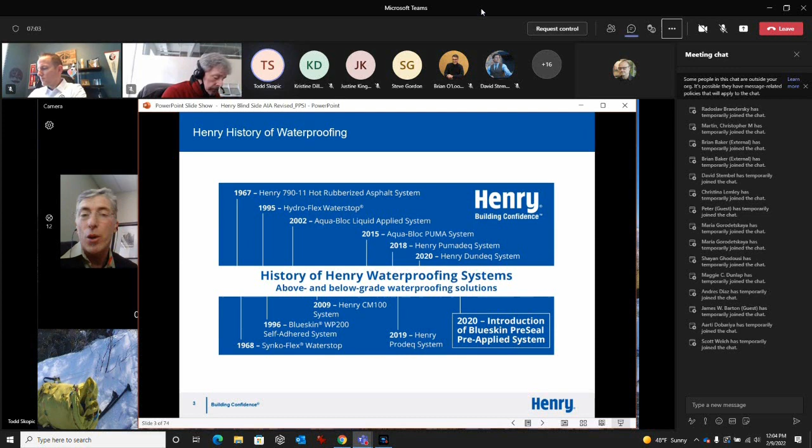We also have our own water stops that we've had for a long time. There's a chronology of some other waterproofing systems, and then we decided to release this pre-applied blindside system during the pandemic, about a year ago, and we've had great success. It's been the missing link or missing piece of our building enclosure portfolio.

These are a couple recent projects. That was in the summer over here. This is a school up in Staten Island, and the picture to the right is another school up in Cambridge, Massachusetts, at MIT. I took that a couple weeks ago up there in a little light snowstorm.

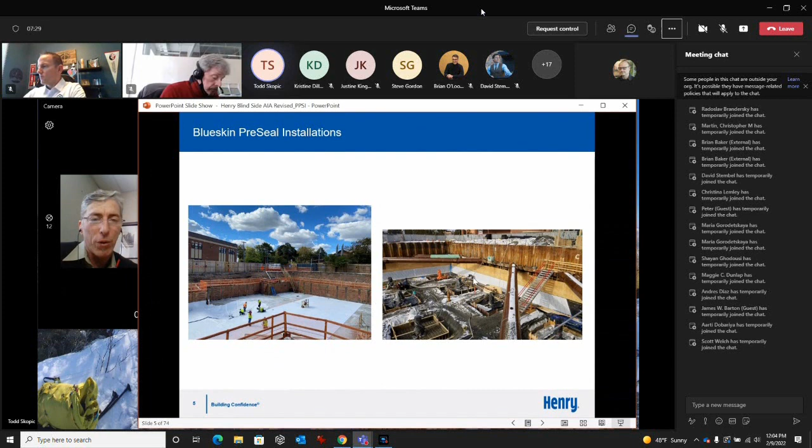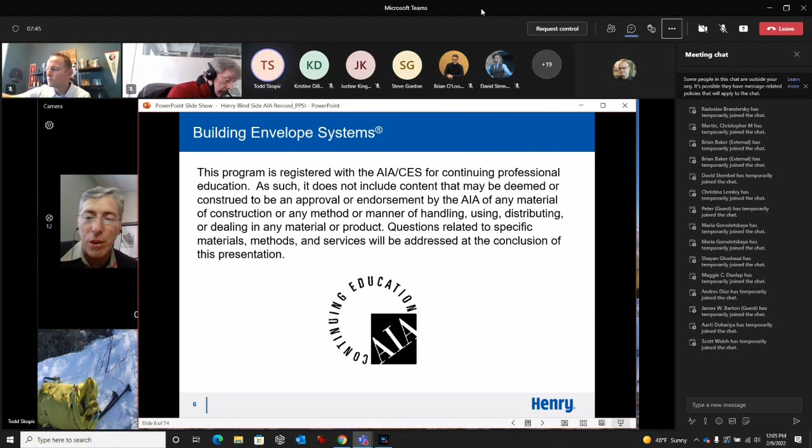So this is AIA. We'll keep it fairly generic and clean, but the intent is to provide education. Both myself, Brian, and Steve have a lot of history and knowledge with these deep foundation systems.

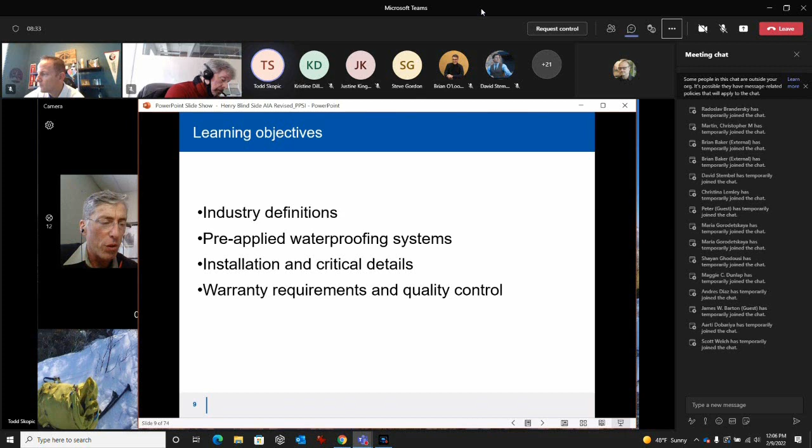The learning objectives: I'm going to go through some brief industry definitions, what are pre-applied waterproofing systems, some installation and critical details, and some warranty requirements and quality control, which are really critical because you can have a great system, but if it's not installed properly, it doesn't really matter. So we have a very good QA, QC program and a good warranty program as well.

So some definitions, this is somewhat elementary. There's both positive side waterproofing and negative side waterproofing. Positive side is the same side as the source of the water, so you're basically putting a system on the same side as the source of the water.

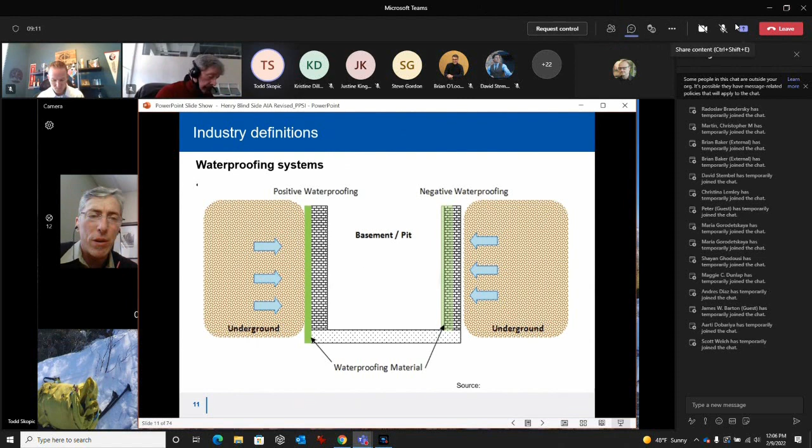Inversely, negative side would be the side opposite the source of the water. That's not really the way you want to lead your design, but if it's a retrofit and there's no other option, then you're looking at the negative side.

There's both pre-applied and post-applied systems. What we're discussing today are pre-applied or blindside waterproofing systems, which are also positive side. The systems are on the same side as the structure as the source of the water, but they're installed prior to the structure. So you've got this green appearing system here, which would be under slab waterproofing, and then vertical waterproofing, that would be your pre or blind side waterproofing.

Post applied is either you cast a wall, let it cure for a few days, and then post apply a sheet membrane, or in the case of negative side, that's also a post applied system.

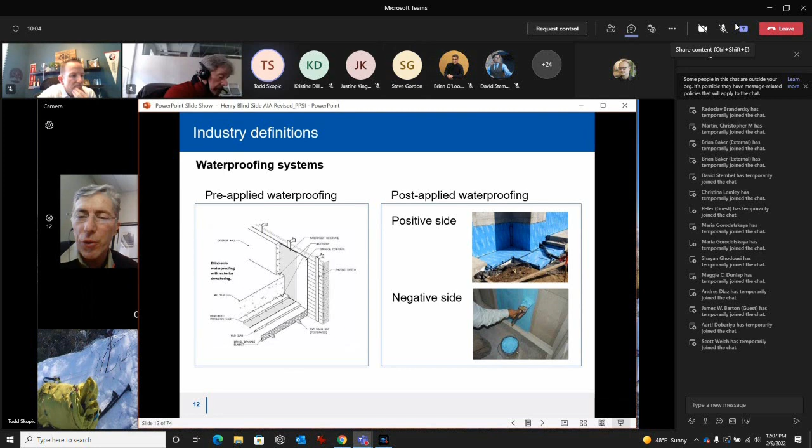The parking situation in DC is pretty crazy. I think there's a parking spot, at least it was about a year ago, in Georgetown in a garage that you could purchase for the low price of $80,000 to get a deeded parking spot.

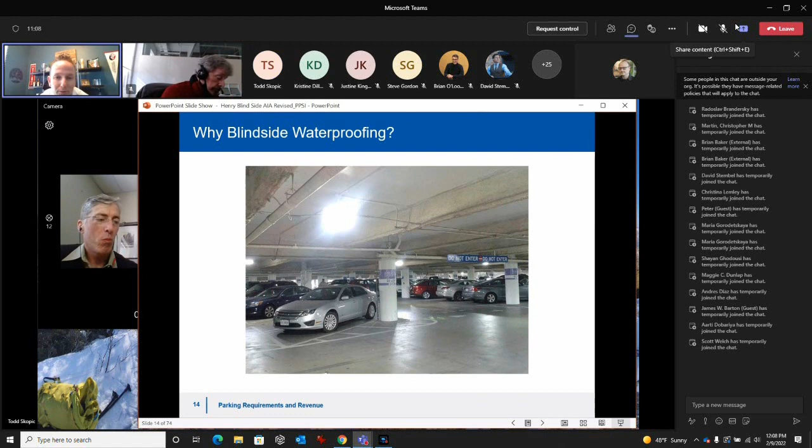These parking spaces generate a ton of revenue for the building owners. That's why we do blindside waterproofing, because we need to push these buildings out so far to the property edge so that we can fit in one or two more parking spaces. This will come up a little later too, some of the issues with blindside waterproofing and why we see leaks. But this is the main thing: everybody needs this space for generating revenue, but also a lot of times the number of spaces is a requirement based on the permits being received.

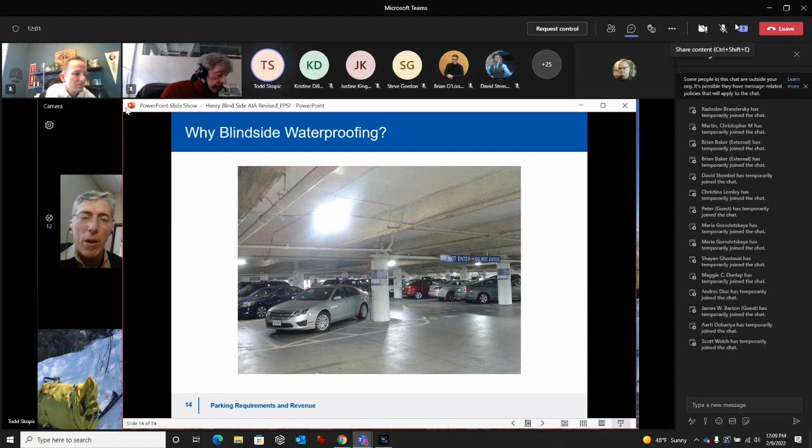A case in point with parking garages: a lot of times owners like to have a well-lit parking structure or parking garage, hence the lighting, etc. So painting the walls white is obviously going to make it much brighter in appearance. And if you have vapor or water pushing through that foundation wall, then the paint is going to fail. So that's another reason you want to keep water and vapor drive away from those walls.

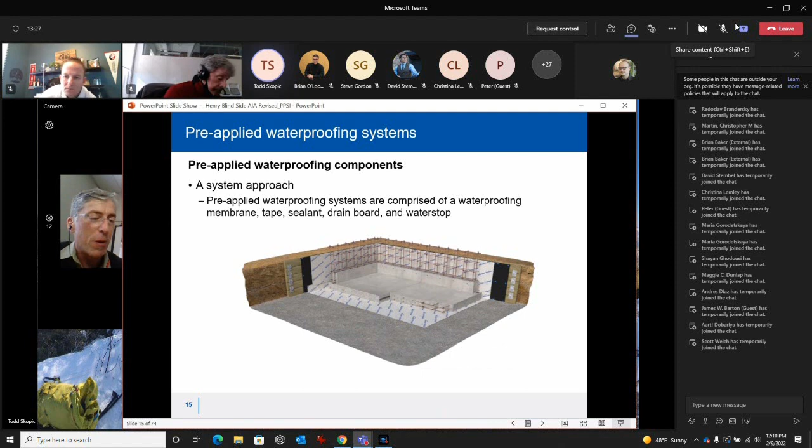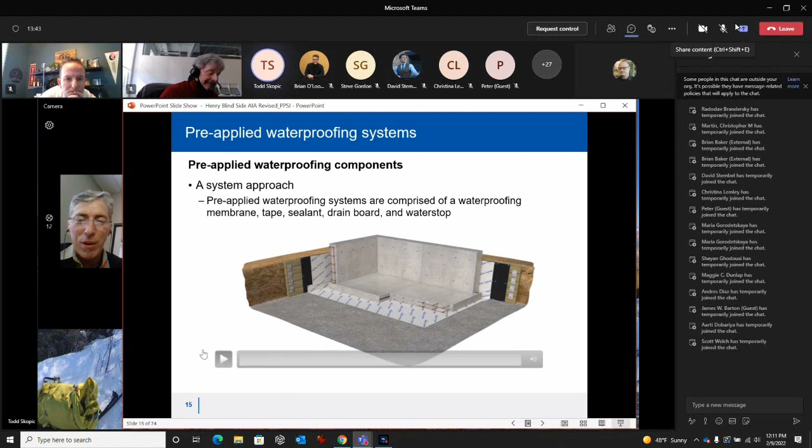And of course, if it's from the same supplier as the waterproofing system, that supplier can likely provide a single source warranty. So anyway, just another little aspect of this graphic, and then the wall gets poured and you're done. So that looks pretty simple and clean, but as Brian and I will share with you, it's not always that simple and clean.

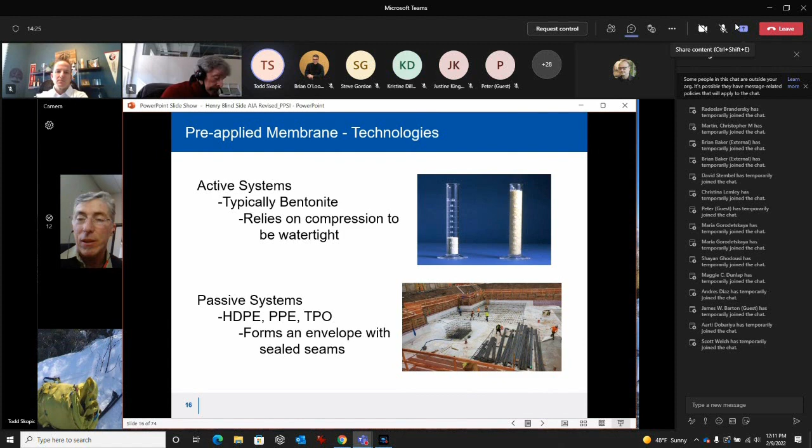Basically there's both active systems and passive systems. So we've got positive, negative, pre-applied, post-applied, and active and passive systems. Active systems would rely on hydration and compression, so that would be your bentonite type systems. Passive systems are basically waterproof membranes, like a high density polyethylene, a polypropylene, a thermoplastic polyolefin, or TPO. Lots of chemistry or alphabet soup there, but basically it resists water right out of the gate. It doesn't require hydration, it doesn't require confinement, anything like that.

The way these systems interface with the concrete is very important, because prohibiting lateral water migration is of paramount importance. So you can either have a mechanical bond, you can have an adhesive bond, or you could have both. With a mechanical bond, that can allow for lateral water migration. So if you have a geotextile with a sodium bentonite in that geotextile, it's going to bond to the concrete mechanically, but water could potentially migrate laterally. If you have an adhesively bonded membrane, that's good for prohibiting lateral water migration. And then there's a technology, it happens to be ours, it's a hybrid technology that offers both mechanical and adhesive bond, which if there's time at the end, we'll cover that a little more.

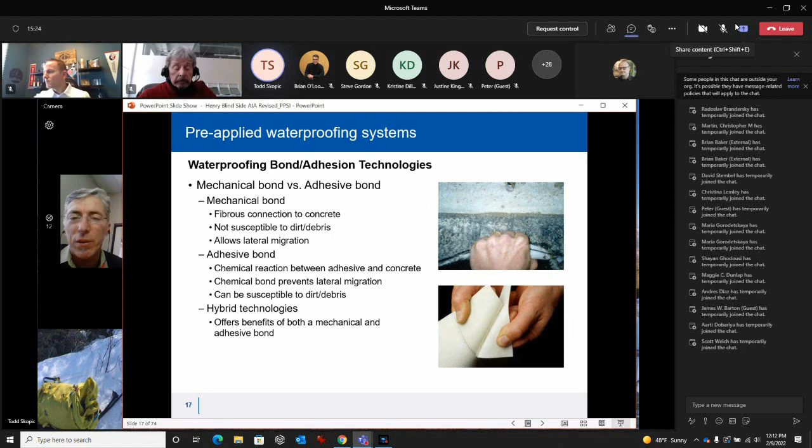So these systems are pre-applied prior to the structure, for both under slab and vertical walls. This little diagram here: if you have a crack and the water gets in, if the membrane's not fully bonded, then that water can travel to find a way into the building. So you don't want that.

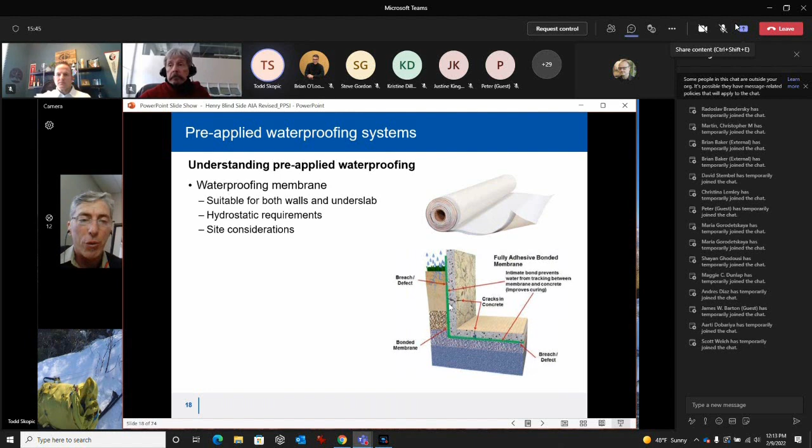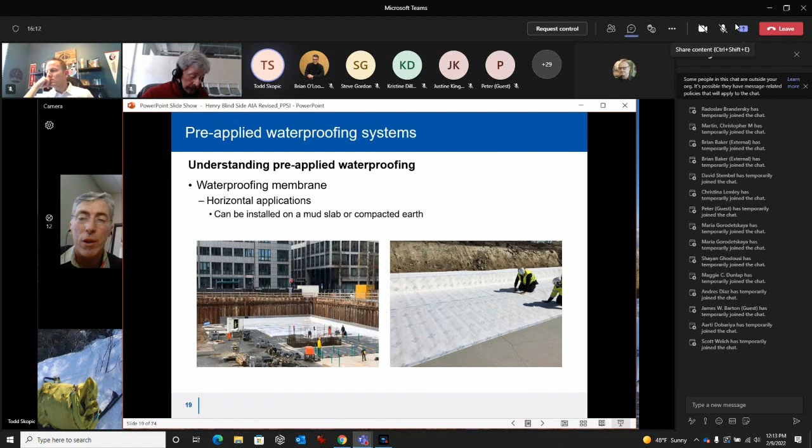Here's a couple of pictures of some horizontal or under slab applications. Some systems require a mud slab. So what these gentlemen are working on here is a little cracked and whatnot, but it's not a structural slab. It's just basically a working surface to get the work out of the mud, hence the term mud slab. Some systems can go on compacted earth or compacted gravel, so that's going to vary by your manufacturer.

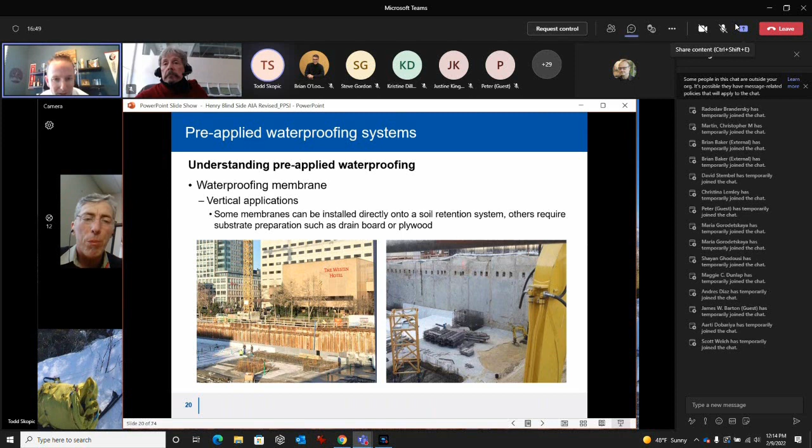We don't see that too much down in this market in terms of SOE construction. Right. Yeah, okay. I wasn't sure if there was something else you wanted to add there.

So why is the reason for most leaks in blindside waterproofing? Basically what we're looking at here is the sheeting and shoring guys. These guys are 90% of the problems of the waterproofing leaks. The reason being is they have one job and one job only, and that's to hold the soil back. They don't care if the building leaks. They don't care if they provided a smooth substrate. They've basically been contracted to just keep the soil from falling in. They're retaining the earth.

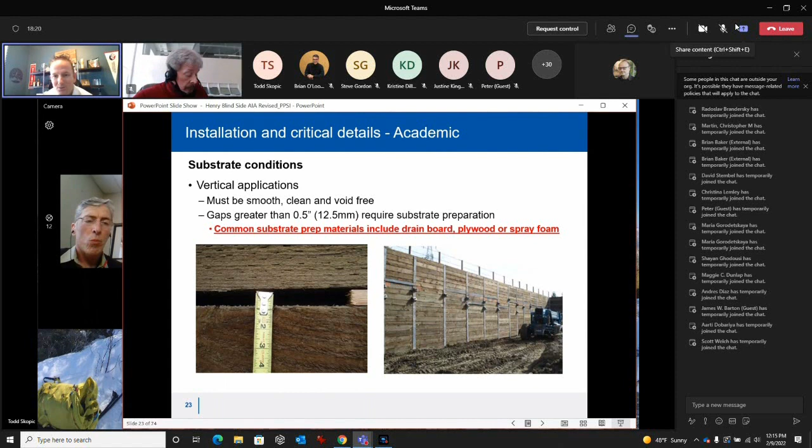The critical details, the academic part of this, is gaps greater than half an inch require substrate preparation. This can be drain board. In a lot of cases in DC it's drain board, but let's say we don't have drain board. Plywood, spray foam, those types of things can be used for this. Typically I don't see spray foam used a lot because while it's an academic way to do it, spray foam doesn't typically expand out to a nice flat substrate. It kind of looks like the surface of the moon as it expands, and that doesn't really give us a great smooth substrate to attach to.

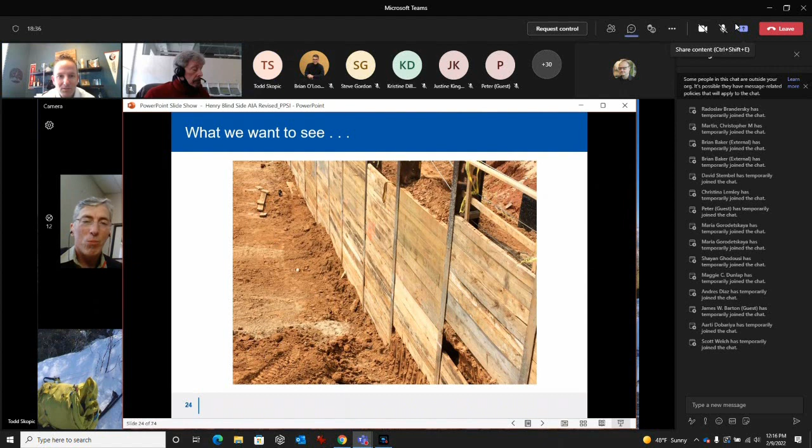So this is what we want to see. If I saw lagging like this in DC, we probably would never have any leaks. This is amazing. So if you go to the next slide, this is typically what we see.

So again, these guys, they're not concerned about how you're going to have your waterproofing applied to this wall. They're concerned about the substrate or the soil falling into the hole. So they're going to do whatever means necessary to make that happen, whether that's going to be walers or rakers or tiebacks or whatever needs to be. And a lot of times they are not even anticipating all the things that they're going to need because they'll dig in and find they have problems. We'll see some of that in a little bit here.

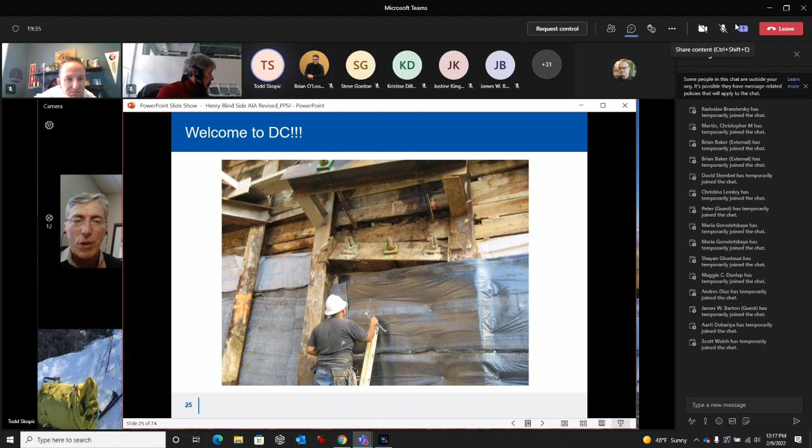So Brian threw out that term, a waler. This horizontal beam here is referred to as a wale or a waler. And a raker is basically a diagonal strut that would go from the soldier beam down to the foundation, and then there's all kinds of cross lot bracing and lots of crazy stuff. So how is it drawn? There was nothing in this slide. Yeah, so how it's drawn, you guys typically draw straight, perfect everything.

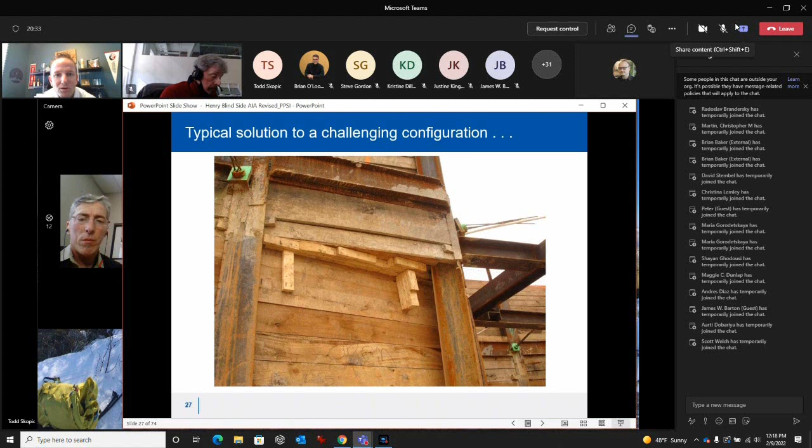So what about mid-lag, back-lag piles? You can see the lagging boards look pretty good, but now all of a sudden we've got a mid-lag pile, which means the lagging board goes to either the middle of the pile or the back, and we've got to waterproof around all of that. You'll notice the tiebacks - those tiebacks all have to have some type of detailing over them because they're giant straws coming through the waterproofing. So they have to be detailed. So how do we detail that?

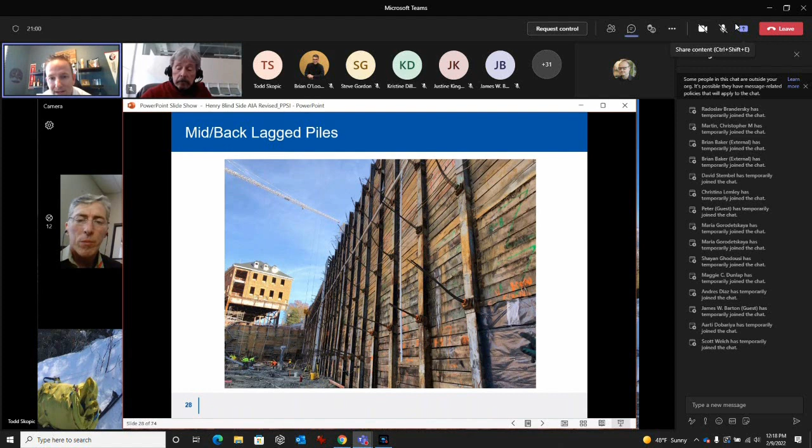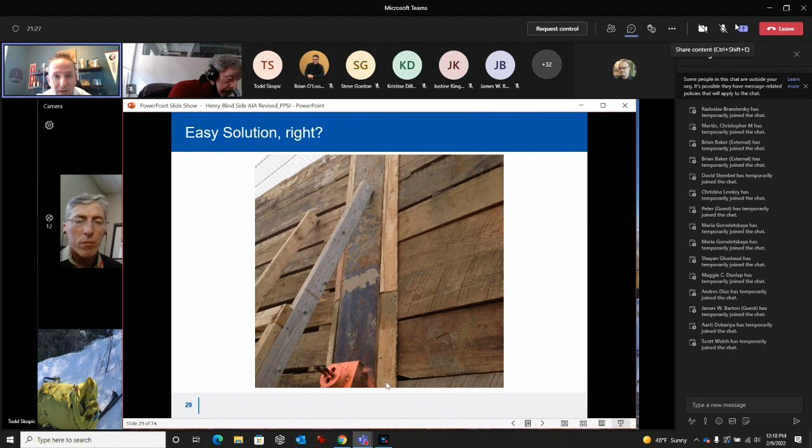So if you go to the next slide - one common solution to this is building up these kind of wood cants so that we can take the membrane and smoothly go over it. We can make special field-fabricated tieback boots to go over the tieback that you see there. So that's the easy solution until our friend the structural engineer gets in the way. If you go to the next slide, you'll see this a lot of times where because they've missed with the pile, that wall's only 12 inches thick.

So they have to run the rebar through the pile and incorporate that pile as part of the wall. So if you picture how our waterproofing works, we can't go around this pile because we have rebar that needs to go through it. The structural engineer will dictate that.

The other solution would be, if we can't run the rebar through it, we have to thicken the wall at that point. And if we thicken the wall, even by an inch or two, that screws up the jam-packed parking we have down there, and that could impact the approvals we have to build the building, because now we've reduced the amount of parking. Every 12 feet or 20 feet or 16 feet, wherever these are, the wall gets thickened by 3 or 4 inches. I was always amazed because we'd say, can't you just thicken the wall? What's 3 inches? But we got kickback from the design team, the builders, the general contractor, because that would impact the parking and mess up their zoning approvals for getting this built.

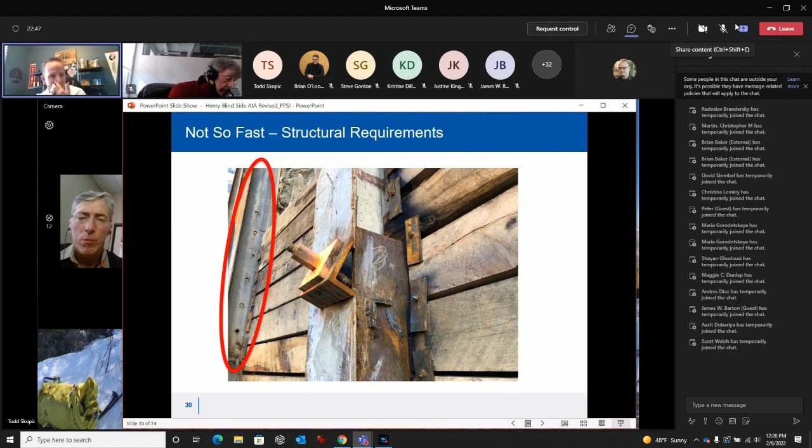And then even if we could do that, how do we get around this? You can see a PVC pipe coming out, you can see this braided cable, which we'll talk about. This would just allow water to bypass the membrane. These sheeting and shoring guys are doing everything they can to hold the earth back, but they aren't necessarily concerned with making sure we have something we can waterproof.

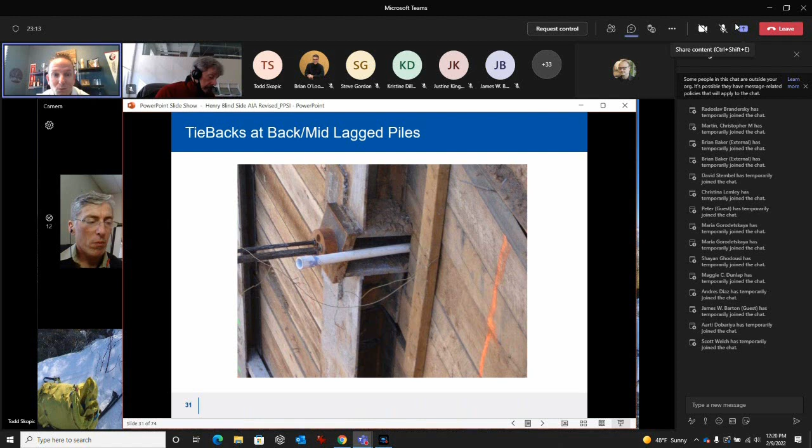Walers with tiebacks, talked about this. If you'll notice, they're right in the middle. You'll see the threaded rods coming through where the membrane would be. This becomes a problem, these have to get detailed properly. The way to do this is to leave blockouts or box outs around them so they can be cut out after the wall is poured. But that doesn't necessarily always happen.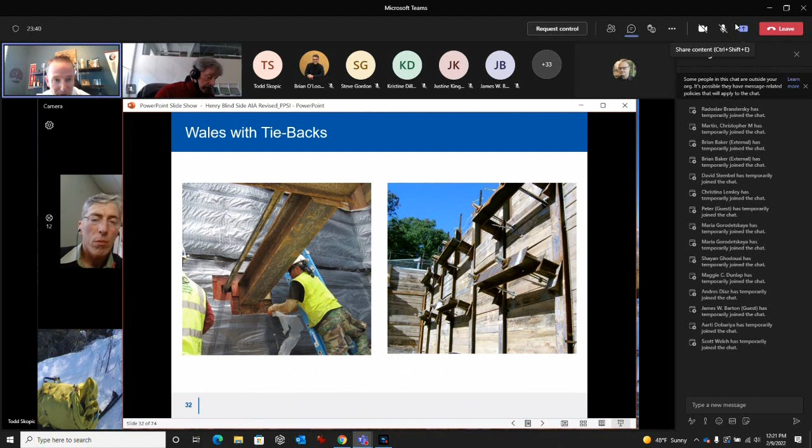We see this a lot, we come back, everything's poured, and we say, how is this detailed? Oh, we just, industry term, pookied it up with as much liquid as we could. And that thing leaked from the day it got poured because it wasn't done properly.

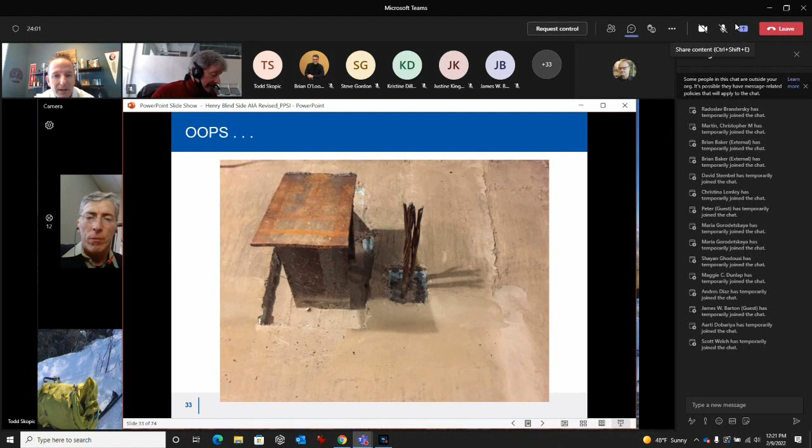Temporary power. A lot of contractors will take temporary power, run it down the wall on the site, and strap it tight to the lagging. If you think about what the membrane has to do to get over that, we can't just run the membrane over top of it. So it would have to be some wood cants built around it, so we had a nice smooth substrate. Or what we see more often now is these contractors using standoffs, where we'd detail each of these standoffs as a penetration in the wall, and then pour this into the wall, and that conduit would just be abandoned there. But at least it's a way to detail this properly.

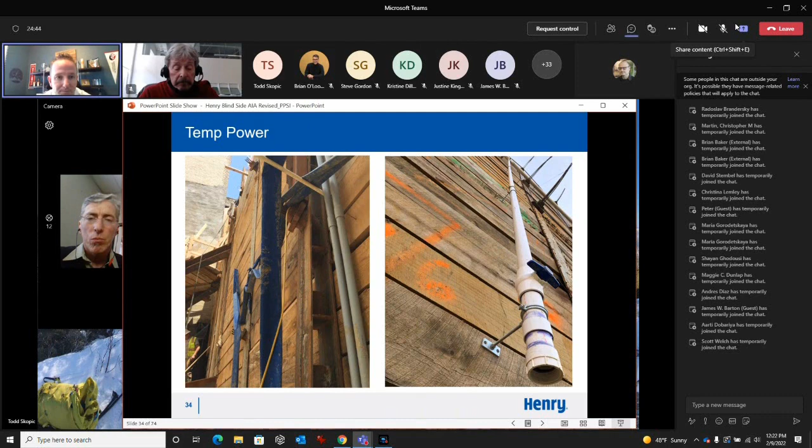So we finally got one with no tiebacks, yay. This is down by Nationals Park, and they couldn't use tiebacks because of the subway, the metro. You can barely tell there's an excavator down underneath this. They couldn't even lift the arm of the excavator up, they just had to slide the dirt and get something else to pull it because there was so much steel in this. Now this is important, because when a contractor bids these jobs, they're bidding mostly on how many tiebacks, or something along those lines, or a nice long flat wall. And if they don't know there's going to be hundreds of these penetrations, it's going to be a huge change order.

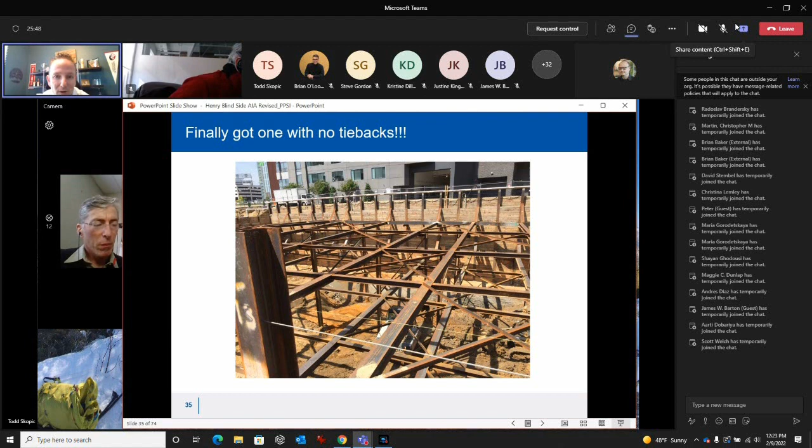So these pose a couple different problems. One, you've got hundreds of penetrations through the membrane, and two, it may be a large change order to the owner because of the way this was built.

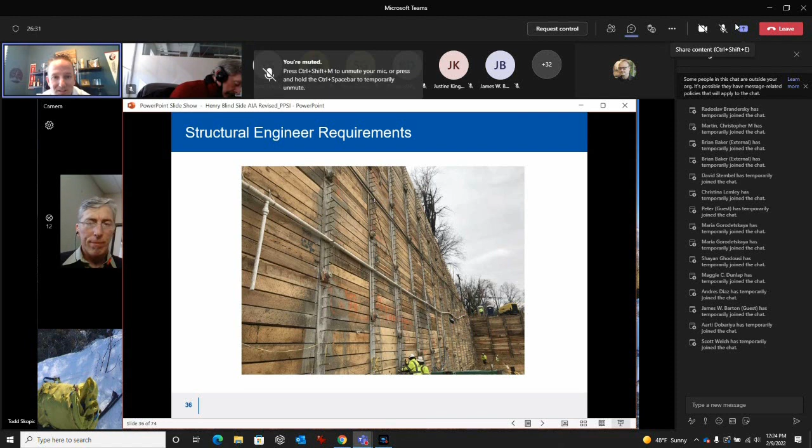Structural engineer, again, our friend. Now he comes out and says, oh, we have to have Nelson studs to hold the wall in place. So now look at every one of those Nelson studs. They have to detail around every single one of them and put a water stop around every single one. I know for a fact on this job, the contractor did not pick this up, that all these Nelson studs were there, and it cost the installer a lot of money in detailing. It probably took him 10 times longer to install this than if it was a nice smooth wall. When you're talking about labor charges, that's a huge nut.

Go ahead, Todd. What about underpinning? We see this a lot, building right up to the building next to us. So here's a typical spec: interior surfaces of cut rock and concrete auger pile retention walls should be planar. Now that word planar is kind of a bogus word, right? Because what does planar mean to you? What does it mean to me? What does it mean to the guy doing the sheeting and shoring or the underpinning? In this instance, the guy doing the underpinning thought this was planar.

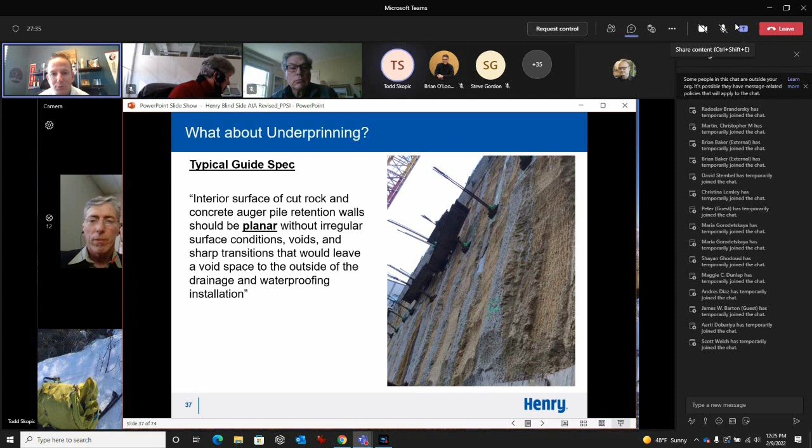And if you picture hanging a sheet of membrane on that and you're going to pour concrete up against it, it doesn't matter what sheet you put there, the chances are it's going to tear. So we talk about what is a planar substrate, how do we get it planar, what do you need to do, how can it be fixed? It's a big issue that we have, and making everybody on the same page. That's why we want to do pre-con meetings also, to get all this out, and we'll talk about that in a little bit.

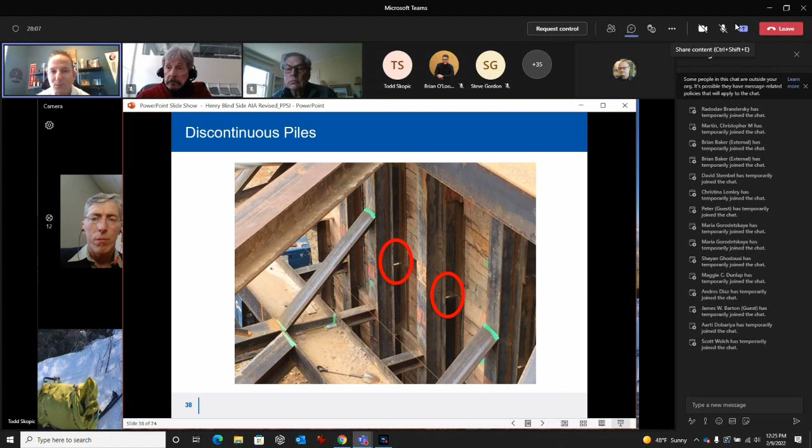Go ahead, Todd. Again, discontinuous piles. These are things we see on every job. If you went through my phone, you'd probably be horrified with all the different pictures I have of conditions like this. In situations like this, we'll typically use the piles as the waterproofing, where we would terminate to the pile. But in this case, we couldn't do that because those piles don't connect. So how do we get that to be waterproof, watertight? That's another big issue.

So we've tried working closely with the sheeting and shoring guys and have met with several of them trying to figure out what we can do and what we need as far as requirements for waterproofing. Some of them have listened, and we're working with others as well. So go to the next one, Todd.

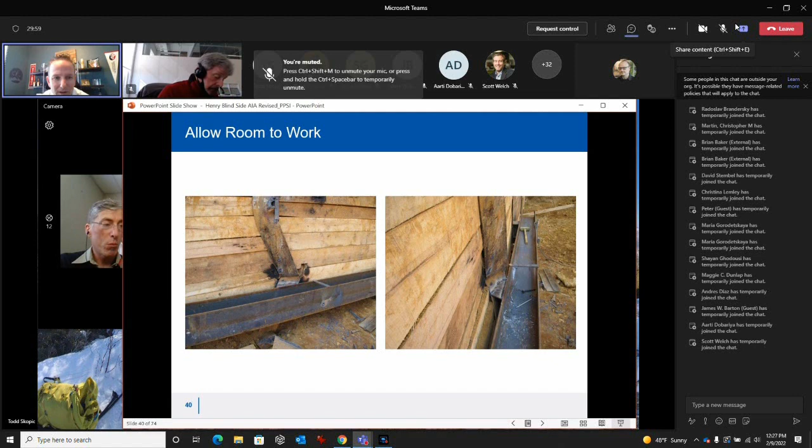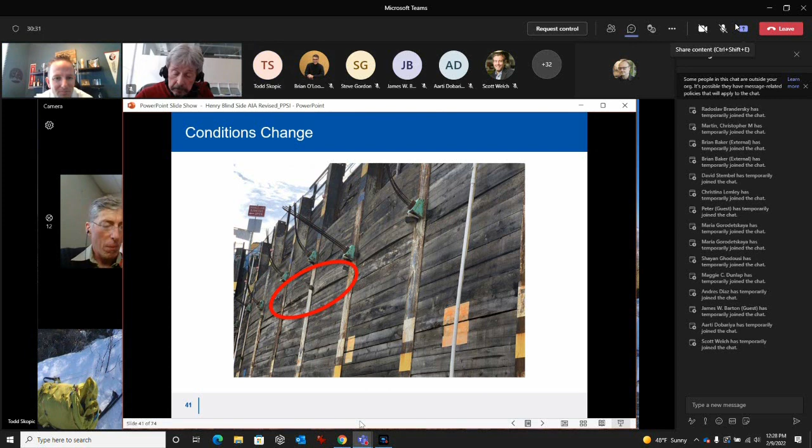So we start thinking about things like this. What are some of the issues? These are a lot of the issues, and it's not caused by the person installing the waterproofing, and it's not caused by the manufacturer.

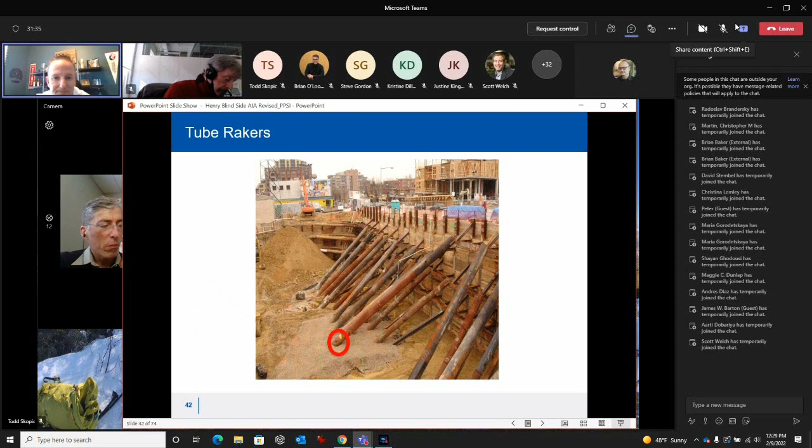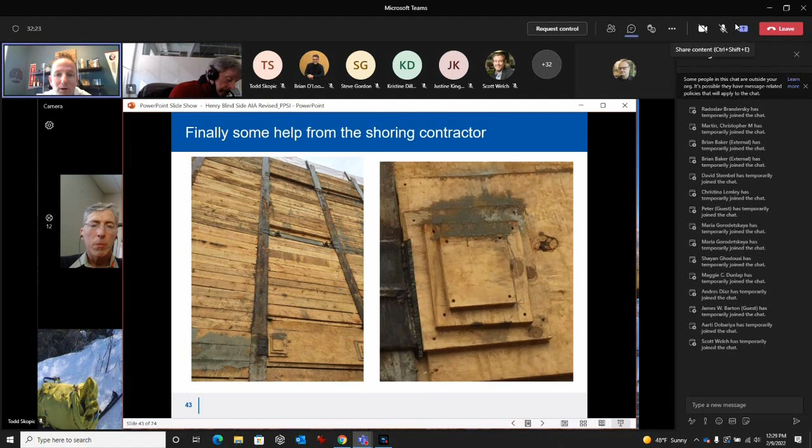Finally we get some help. There are a couple of sheeting and shoring guys who decided to put a waler between the two piles and recess the tiebacks, which was amazing. Then they could put plywood over top of it, and we had a nice smooth substrate. Problem was the tiebacks weren't recessed far enough, so they stuck out past where the plywood would be a little bit. So we came up with this nice detail where we put different sizes of plywood over it, so we have something smoother to transition to. If we put drain board over this and then our membrane, this works out really well. So we're starting to make progress with these sheeting and shoring guys. Hopefully we'll make more as time goes on, but this is a good start.

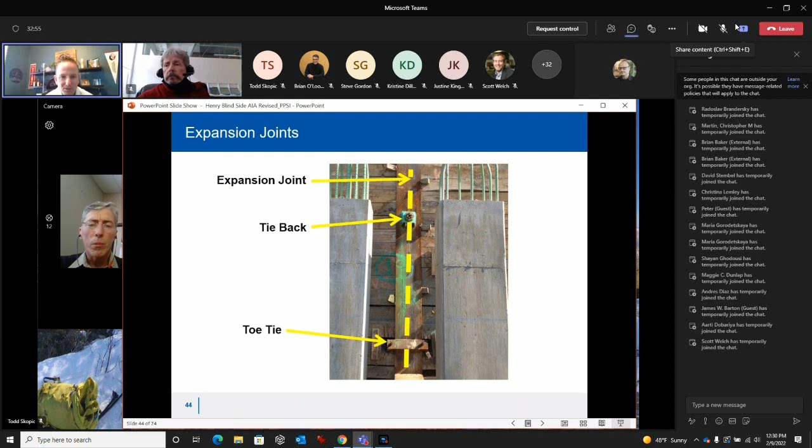Expansion joints - this is one of my babies. If you've ever done a job with a below-grade expansion joint, you run the risk that the joint falls exactly on a tieback or on a pile with tiebacks. So you have an expansion joint - how do you get it to sit flat on the pile and then get around all those tiebacks? We came up with a solution: the contractor actually builds a metal box to get over top of it. It's canted on all sides, and then we have the expansion joint factory-fabricated to match the dimensions of the box in the field. Then they can install it, and we can get that expansion joint up and around the entire tieback, toe tie, whatever's in the way.

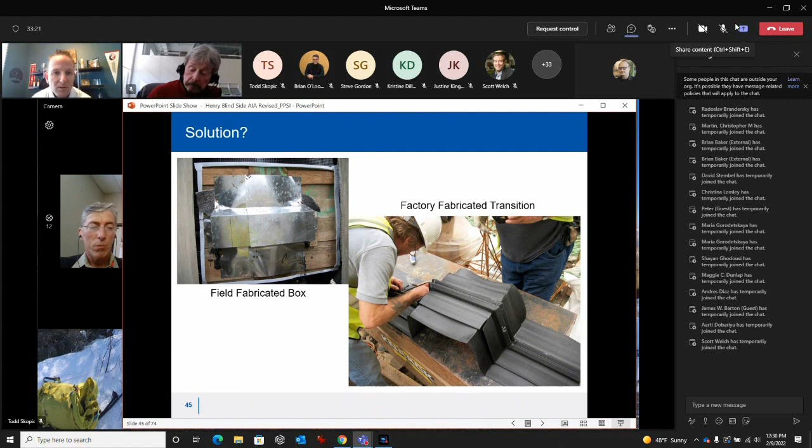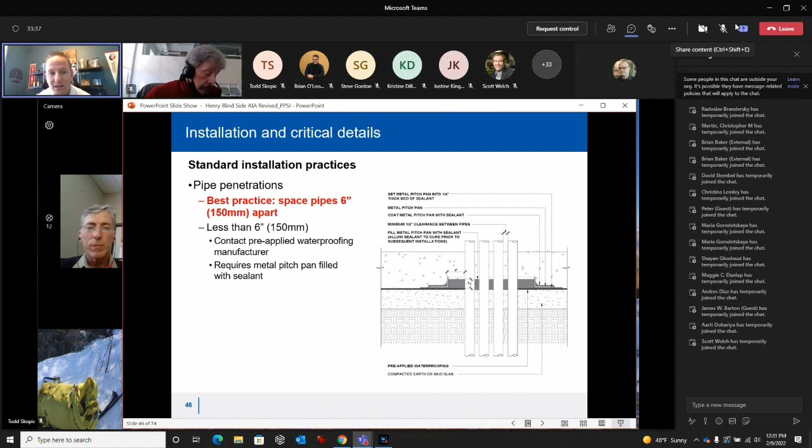Installation and critical details - best practices say we want six inches between pipes. Pepco's going to give us 1.5 inches, and there's no argument about that, that's what it is. So how do we detail around that? This is typically what we see - think about a person's hands trying to detail in between each of those pipes. Some of those aren't even an inch apart. So in the real world, we talk about how we're going to build this. Are we going to box the whole thing out? Are we going to stub in pipes where the contractor can detail around each individual pipe and then plug the next pipe in? These are a lot of the things we see that cause leaking problems.

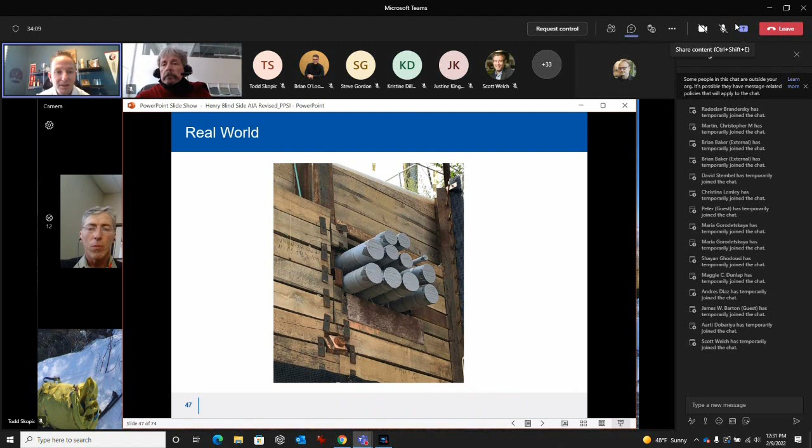Soldier pile tiebacks - yeah, there are tieback boots, that's the easiest way to do it.

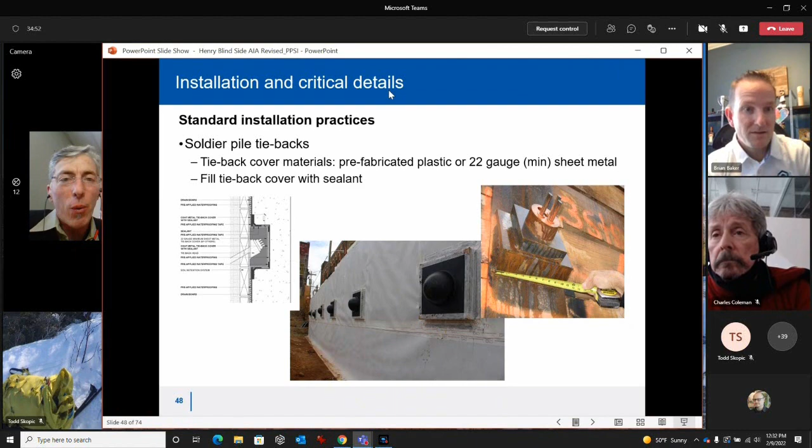You're on mute, Todd. Still on mute. Still on mute, all right, we'll just go to the next one.

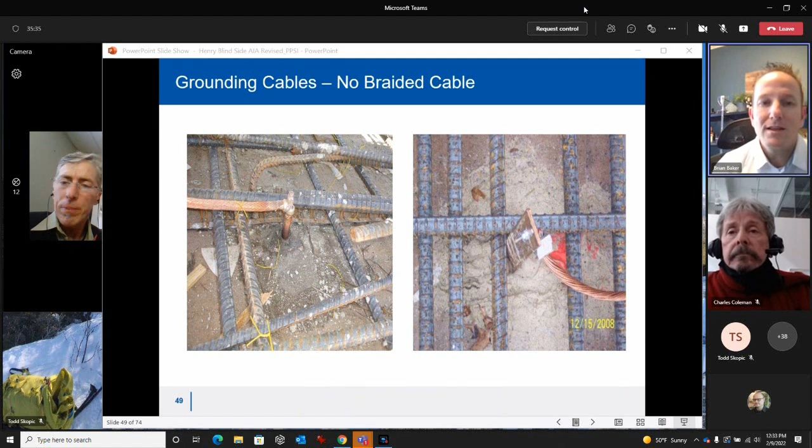Braided cables, that's another big issue. You can never seal a braided cable, you can't get between the braids, doesn't matter how hard you try. We always say you can't penetrate the membrane with braided cable - it's got to be something solid and then welded to the braided cable. I've sat in countless pre-con meetings where the electrician said that's impossible, you can't do that. And I show them these pictures, and then they kindly sit back down and say okay, we'll do that. So it's possible, we've seen it done a million times. We can't penetrate with braided cable - if you do, you're going to get a leak, and you can't ever fix that leak.

Kind of a side note also - we always see the electrical room, and we always see the equipment right up against the wall, fastened to it, tight to the wall. And if you get a leak, guess what happens? It's almost impossible to fix because the equipment's in the way. So we always ask in the design process if you could hold the equipment off the wall, 2 feet, 3 feet - but there's never room to do it, and it never fits in the plan.

And I get all that, but just for fixing leaks in the future, if you had space behind the electrical equipment, a person could get back there and would be able to grout inject. The other part of this is if we do have leaks and the equipment's right there, you really don't want to mix a lot of water with your electrical equipment. So if you can keep it off the wall a little bit, at least you'll have a buffer where the leaks will drop down and maybe not get directly into the equipment.

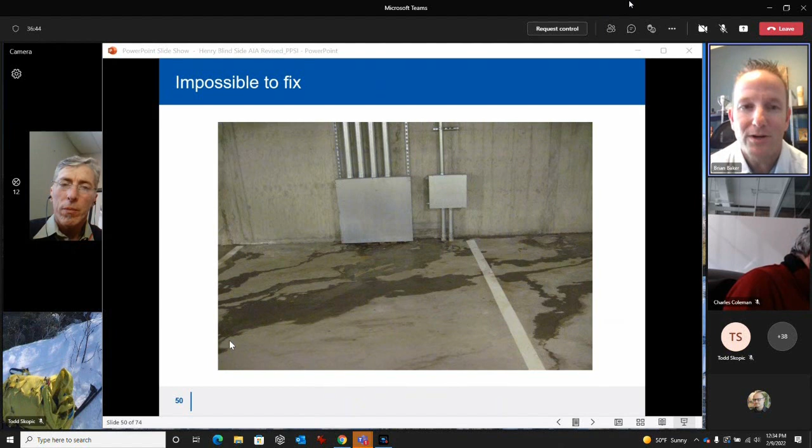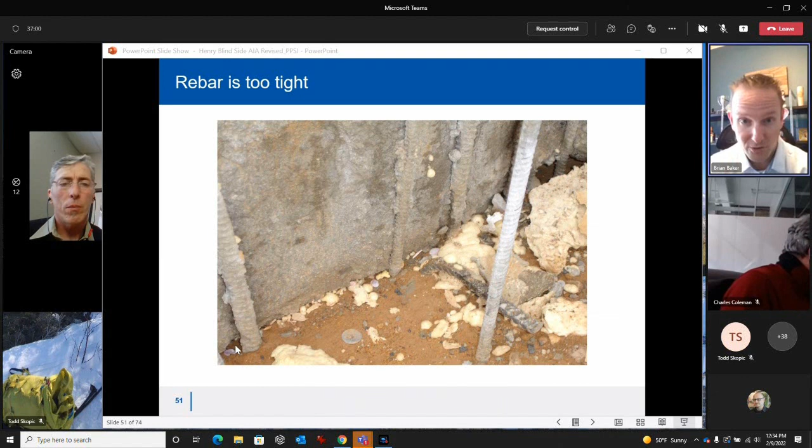Rebar too tight, there'll be an independent inspector involved, making sure that the rebar doesn't touch the membrane. This is not only a waterproofing issue, this is also a structural issue because the structural engineer is going to require some amount of coverage of that rebar by the concrete.

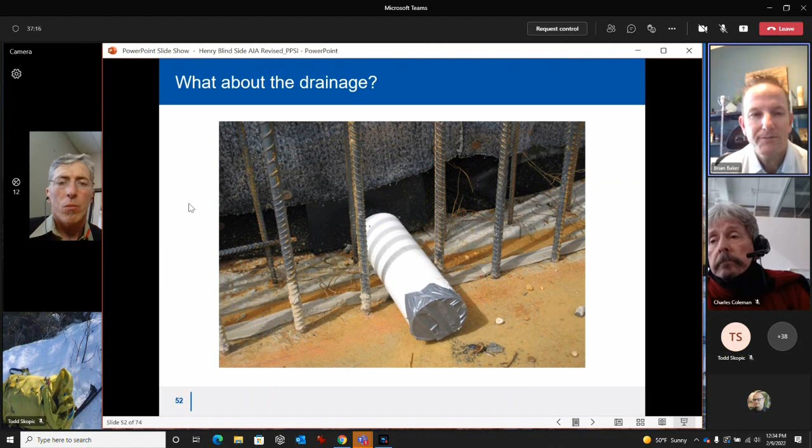What about drainage? We see this a lot. Drain pipe, the correct drain pipe, tape over the front of it so that when they pour the concrete, it doesn't fill up with concrete. If you go to the next slide, this particular sub had the tape on, no problem, but they used the wrong pipe and the concrete crushed it, filled up the pipe. Now you're trying to get water to weep through this pipe into the below grade system.

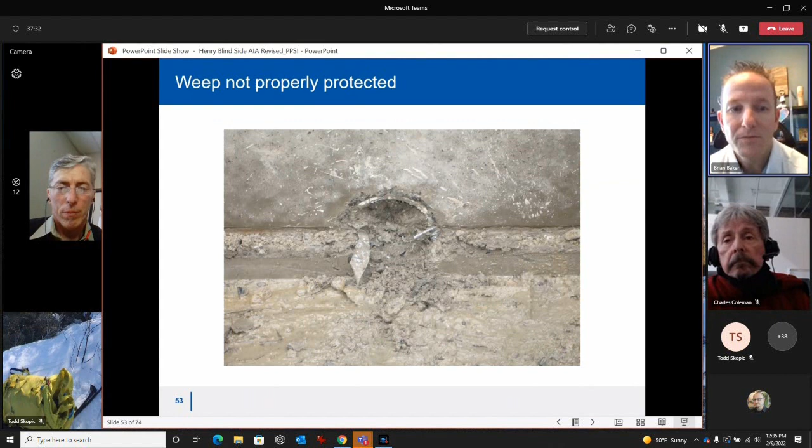Weep not properly protected, making sure that all the connections are made.

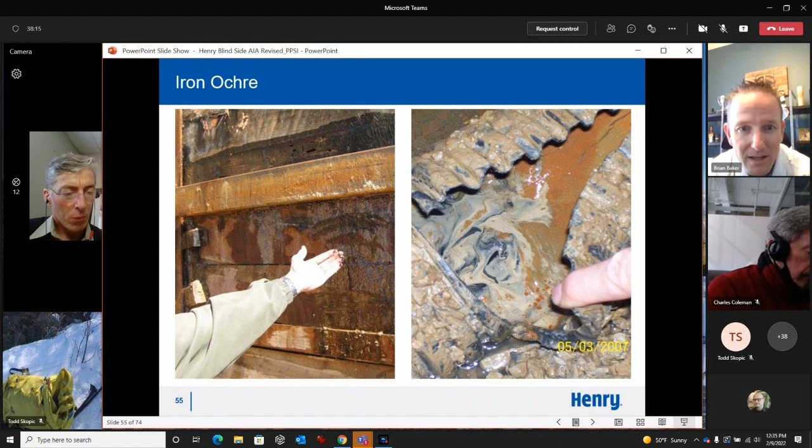And then we get to our iron ochre. This is the DC bacteria. This is the cause of several leaks in DC because it's like a bacteria that grows. It'll clog up your drain system. That's why we want hard connections in the pipes. The main thing with this is that if you have iron ochre on your site, you should always incorporate cleanouts, lots of cleanouts that can be jetted out on a regular basis. And the main reason is if you don't, this can result.

So this was a core hole in a site that was a drained site. And why is that important? Because if it's drained, that means they can build the wall for non-hydrostatic, which means it doesn't have to have as much strength. The design isn't as much. If your cleanouts aren't there, and if your drain system gets clogged and you have water pressure building up on the outside, yes, it's going to leak. But what does that do for your structure that is designed for non-hydrostatic pressure, which now has 15 feet of head pressure on it?

So that becomes an issue. This wall, they cored this, and that thing just leaked like that for 10, 15 minutes, just on a non-hydrostatic design. So they had to go back, and they now have to jet out their cleanouts once every 3 months, once a quarter, just to make sure that this doesn't happen in the future. So that becomes a big issue with this, and not only for iron ochre, but just in general, making sure you keep your building at non-hydrostatic if it is non-hydrostatic.

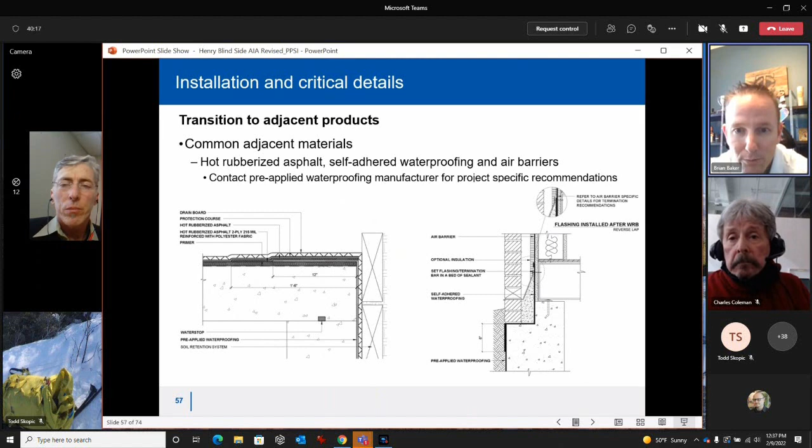Transitions at critical details. The beautiful part about this is there aren't many below grade manufacturers that are able to tie in from their below grade product to their plaza product or to their air barrier product. And as we keep this AIA appropriate, there are a couple, wink wink, nod nod, that can now do this. So the details are pretty basic. It's been kind of the same detailing, but now if you use a manufacturer that has this, there's no finger pointing. If something's going to leak at this transition, you're calling one company, not several companies. So that's an important designation when specifying that the plaza waterproofing should be the same as the below grade waterproofing, same as the air barrier.

And here's what that detail looks like. A lot of people would look at this and say, man, that is ugly, because it doesn't look pretty, right? My entire life has been spent dealing with things that don't look pretty but make the building watertight. To me, that's gorgeous. That's a lot of hot rubber tying into a below grade waterproofing. And as far as neatness goes, yeah, it might not be an A, but as far as water tightness goes, it's an A+. So that's what we're looking for, is a watertight structure.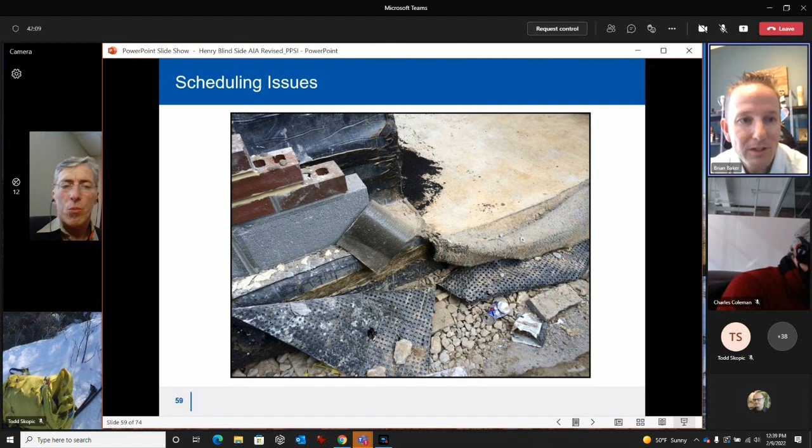So how do we make sure we get things scheduled properly and we get the GC to slow down? Because remember, we're behind schedule the second we put the shovel in the ground. So next slide, Todd.

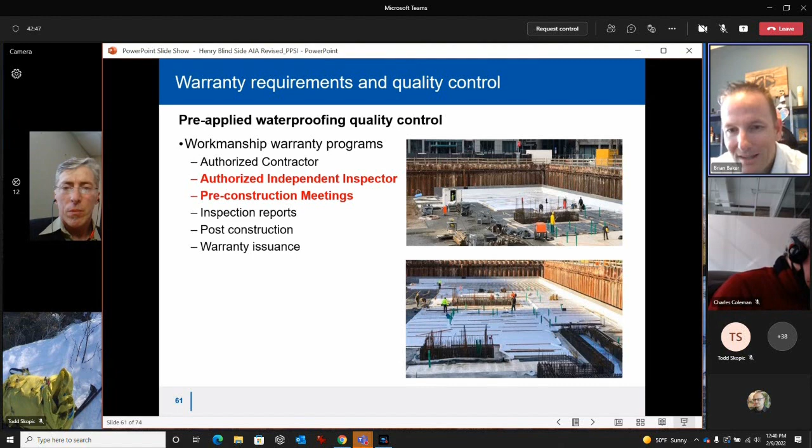And you want a manufacturer who's going to respond to warranty claims and leaks. But you also want to make sure that the building doesn't leak to begin with, which is more important in my opinion. So if you go to the next one, Todd.

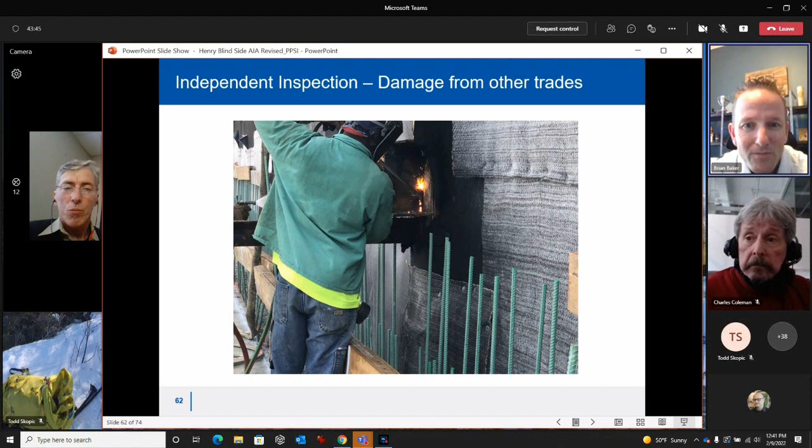Much like construction, every job site is different. If you took the same GC and the same design and built two separate buildings right next door to each other, I guarantee they would be built differently, at different speeds, at different costs, and with different methods, because every job site is different. So we want to get these ground rules out, and that's why we want to have pre-con meetings. We want to talk about pretty much everything that could go wrong on the job and get it detailed out front.

These are not check-the-box meetings. I've been to a million of those, specifically for air barriers and things like that, and it's a 10-minute meeting, yeah, we check the box. That's not what we're looking for. We're looking for going over everything that we just went over.

What about the temporary power? What about braided cable? Who's doing the water stop? Where are the penetrations going to go? Just making sure we get all of that taken care of up front, so that when these things happen on the site, we can go back and say, no, it happened right here. So pre-con meetings are important. Go ahead, Todd.

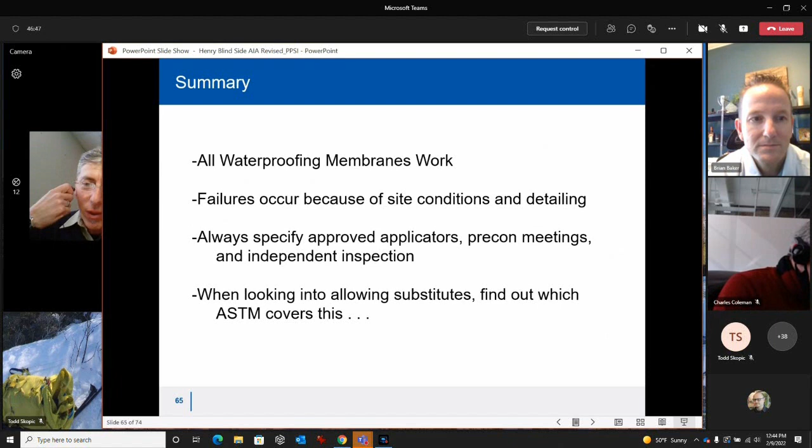You need to make sure that whatever manufacturer you're using has real world experience that can handle situations like this, because it doesn't matter what product you use. There isn't an ASTM in the world that covers this condition. I can guarantee that. Go ahead, Todd.

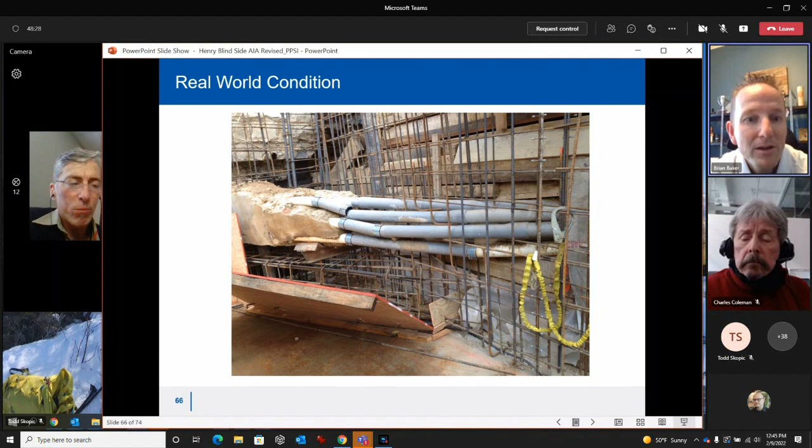I bring this up because on a lot of jobs, we run into situations where something is either designed wrong, or some condition is different than what it was supposed to be. I have a lot of contractors who will intentionally install things incorrectly, and I say, why'd you do that? And he said, that's the way it's designed, that's the way it's drawn, we're going by plans and specs. And if it leaks, it's not my fault, I did exactly what you guys told me to do. It's CYA and it's crap and I hate it, but it's reality.

So we're trying to eliminate as much of 'not my job' as possible.

It's unfortunate that everybody kind of lives in this world where if I suggest something that doesn't work, then I'm at fault. But if I do something that I know is not going to work, I'm scot-free. So we're really trying to eliminate 'not my job' syndrome. Go ahead, Todd. You're still on mute, Todd.

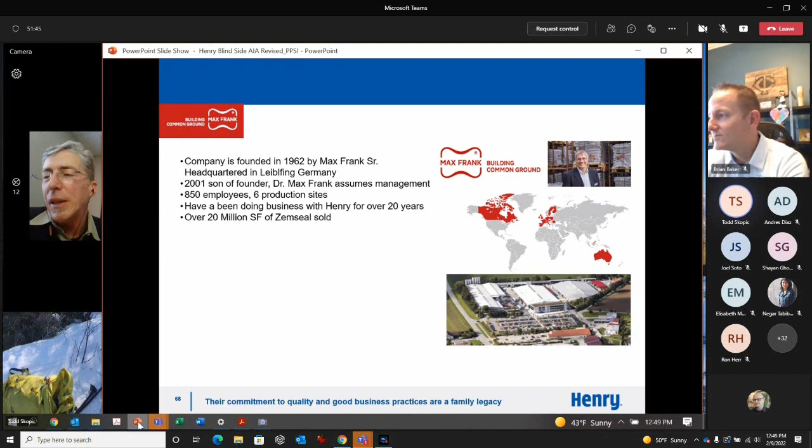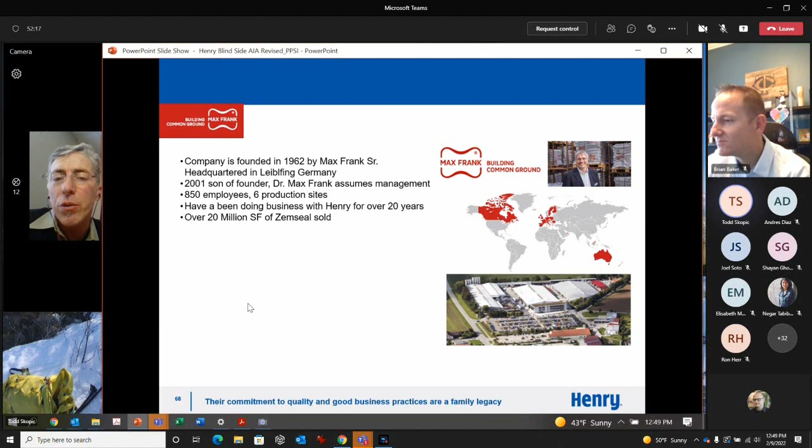This isn't a new product or a new system. We've had a relationship with a German company called Max Frank for about 20 years. We've been selling them our Blueskin WP200, our 60 mil peel and stick sheet membrane, and our water stops. They have a product called Zemseal, which we've rebranded as Henry Blueskin Pre-Seal. Over in Europe, they've had over 20 million square feet of the system successfully installed.

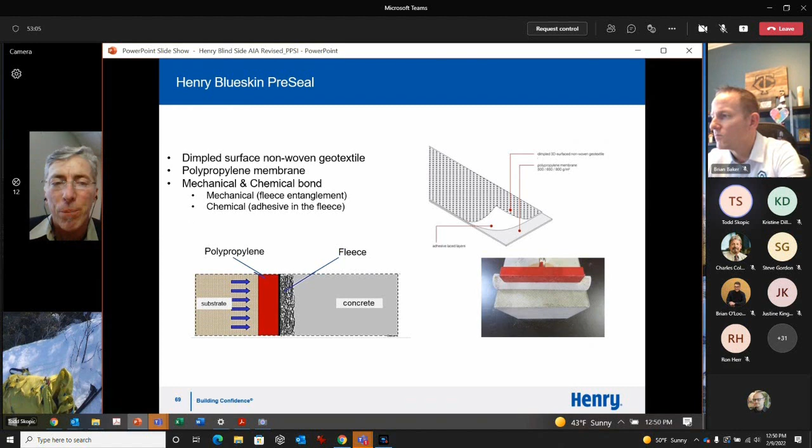I know where your background has been as far as blindside systems. There's another competitor, GCP, that makes an HDPE sheet. This is somewhat similar to the GCP Preprufe, which is based on HDPE, but ours is polypropylene. One huge difference is it's not only adhesively bonded, but it also has a mechanical fleece that the adhesive is fused into. So there's both an initial mechanical bond and then a subsequent chemical or adhesive bond. It's a rather unique system.

There are 2 thicknesses. There's the Blueskin PreSeal 435, which is your go-to for underslab. It's 43.5 mils thick, with the polypropylene being 35.5 mils. So it's a rather thick layer of plastic doing the lion's share of the work, and the adhesive saturated fleece is bonded to that polypropylene. It comes in rather wide rolls, either 1 meter or 2 meters, so either 3.3 feet or 6.6 feet. And it's rather lighter weight because of the polypropylene and less adhesive on it, so it's a light roll.

Contractors like working with it. The polypropylene is more malleable and workable in cold weather conditions. On that project I was at up at MIT a couple weeks ago, it was cold, and contractors enjoyed working with it. It's compatible with our other systems that tie in, like the Blueskin WP200, and as Brian noted, it can tie into our plaza deck waterproofing systems as well.

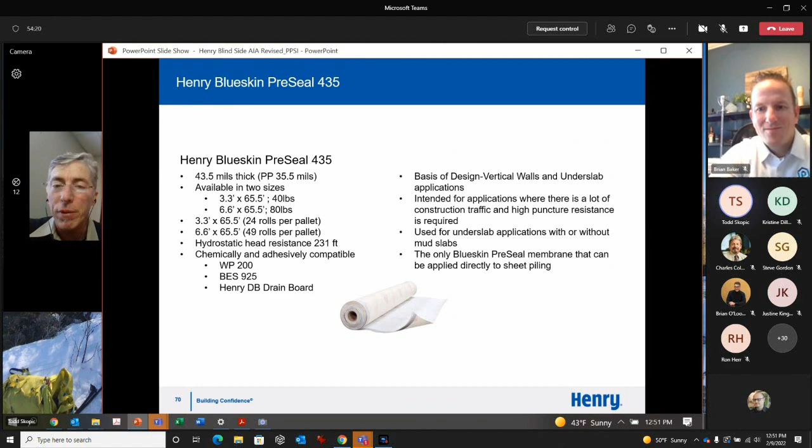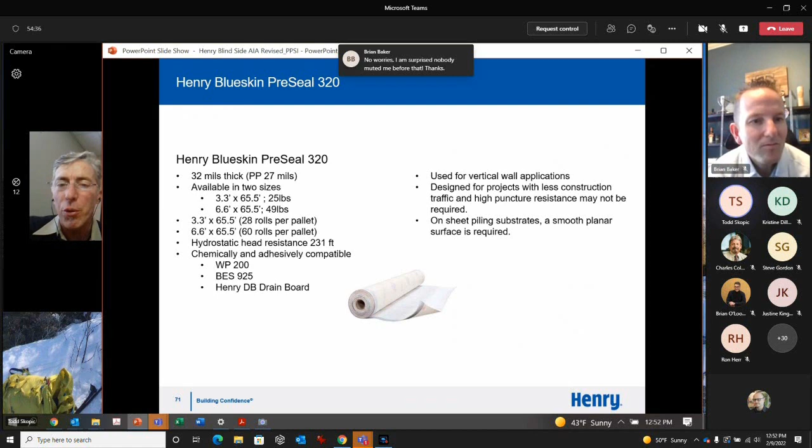The thinner version is more for vertical applications behind walls. It's 32 mils thick, so that's the Blueskin PreSeal 320, also available in 3.3 or 6.6 foot wide rolls.

Just wanted to share some basic information. Here's a graphic of some installers rolling out the 2 meter wide roll. It has a double selvedge edge, so there's a selvedge edge facing up and one facing down on the other side of the roll. When those two sticky selvedge edges come together and get rolled, it's fully bonded. There's additionally some tape, both a double face tape and a single face tape. The single face tape has the same adhesive and fleece, so it bonds to the concrete.

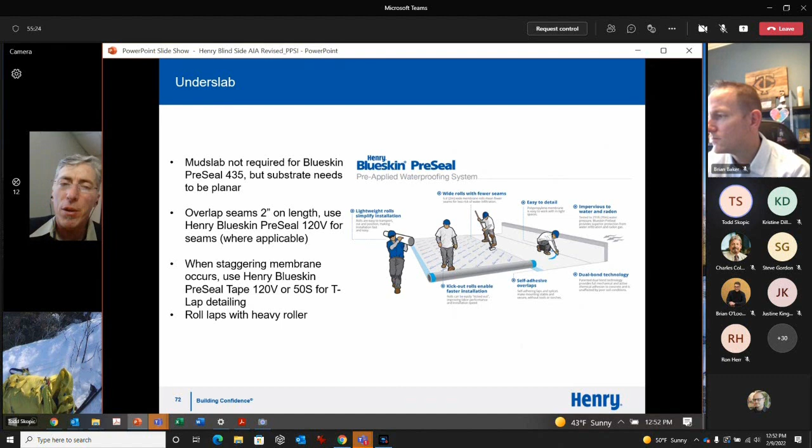So there's just some accessories, and then we have our 925 sealant in 2-gallon pails for doing detailing, and all of our drainage composite and other accessories. Here's a couple pictures of that job I was on up in Cambridge, Mass at MIT. You can see we have our own logo on the membrane now, the Blueskin PreSeal 320.

We also have great technical support. This gentleman here, Jordan, has come over from GCP. He's instructing the installer there. This other project was an underslab installation at Yale up in New Haven, Connecticut. So we've built quite a nice project reference list.

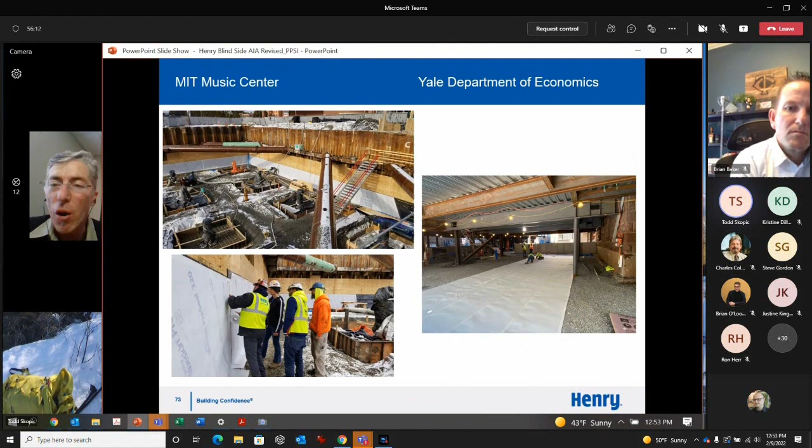Again, this isn't a new system, it's newer to us. We've had wide acceptance with the building enclosure consultants, the spec writing firms, and we're off to the races. So it's all good. That concludes the presentation. Anybody have any questions about the system, blindside waterproofing, or building enclosure?

Hey, I just want to add one thing as an old guy here, what you really get out of this is 80 years of experience of PPSI. Brian's a little younger than me, but he's got 30 years of experience. So between me and him, and you got young Dan, you got a lot of experience, and that's what makes the job successful. Can't get that on the internet.

Thanks. Yep, appreciate it, Steve.

There's Brian's mug shot again. I put you back on the screen there, Brian. If anybody has any other question. Oh, now you're muted, Brian. There you go. That's what people want to see after eating, my face. So that's good. Exactly, well it keeps it real. Even though we're virtual, we're still real. Anyone have any other questions?

Yeah, I have a question. This is John Torti here. How are you guys? Great presentation. Can you hear me? Yes, we can hear you. Thank you.